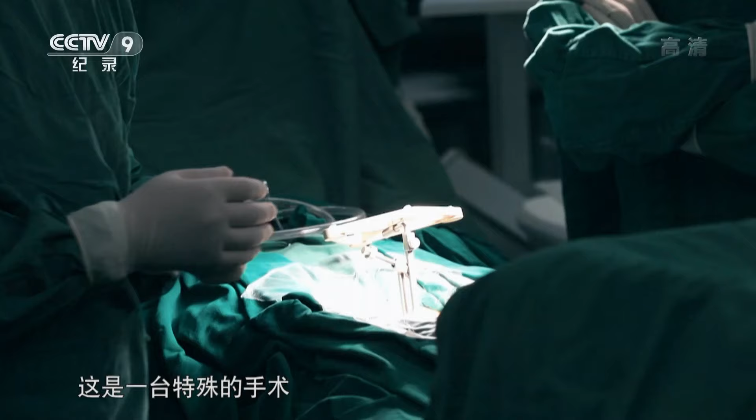Liu Huashui is the director of the orthopedic department and lead surgeon for the coming operation. Lu Shidong, an experienced expert, will assist with and supervise the procedure. This is a special operation. There is a third, more unusual surgeon, an orthopedic surgery robot, to assist with the operation.

The robot is unique. It is the only robot in the world that can perform an orthopedic operation on the limbs, pelvis, and spinal column. It's the 3rd generation medical assistance robot, a leading machine in its field globally.

Some 1,000 kilometers west of Jinan, in the ancient city of Xi'an, another important surgical procedure is in progress. This is an operation to repair a damaged chest wall. Huang Lijun, thoracic surgery department director, will perform it. He would implant a piece of artificial bone.

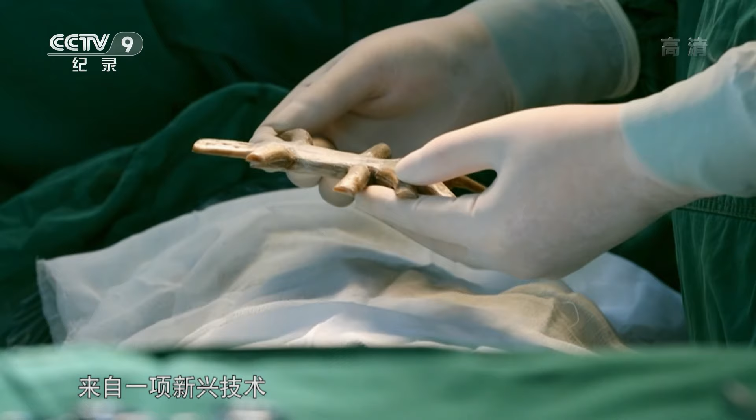The artificial bone is made with remarkable new technology. The patient's chest was seriously injured in a car accident. Researchers have fabricated an artificial breastbone and rib section from polymer materials molded by a high-energy laser beam. The artificial bone was printed layer by layer, enabling it to be as complex and intricate as its natural equivalent.

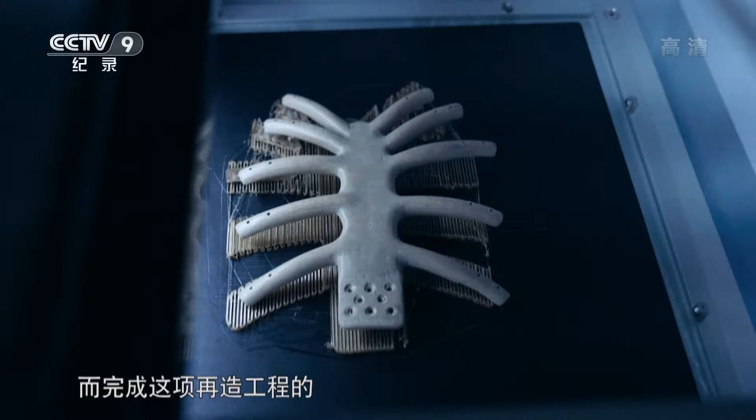The artificial bone owes its existence to 3D printing technology that is now revolutionizing manufacturing.

Meanwhile, in Xinxian County of the inland northern province of Shaanxi, Zhang Jie leaves his home for work. He works in a coal mine. He is the 3rd generation of coal workers, with his father and grandfather also coal workers. At 7:30 a.m., with his work clothes on, he rides an underground shuttle bus. It takes him half an hour to reach the coalface 100 meters underground.

Were this an ordinary mine, he would soon be as black as coal. This is no ordinary mine, however. Zhang Jie steps into a control room and turns on the machine he will operate. A few dozen meters away, it comes to life with a roaring like thunder. The earth shakes, and soon it is plowing into the coal seam.

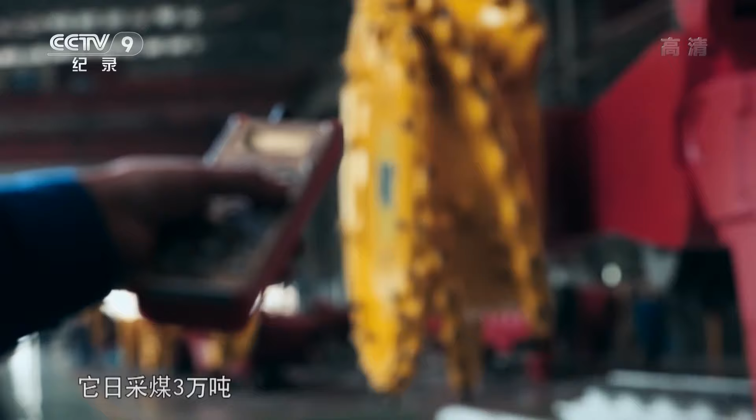The machine can mine 30,000 tons of coal a day, equal to the output of 1,000 traditionally equipped coal miners in a month. It can work non-stop in dark, humid, and dangerous underground tunnels. It is China's largest automated miner, the MG2662 intelligent coal mining machine.

China, with a population of nearly 1.4 billion people, overtook the United States in car sales in 2009. It has since been the global industry's biggest market. China's car demand is expected to reach 30 million by 2020. Doing so didn't just require a giant industrial capacity, special equipment was needed too.

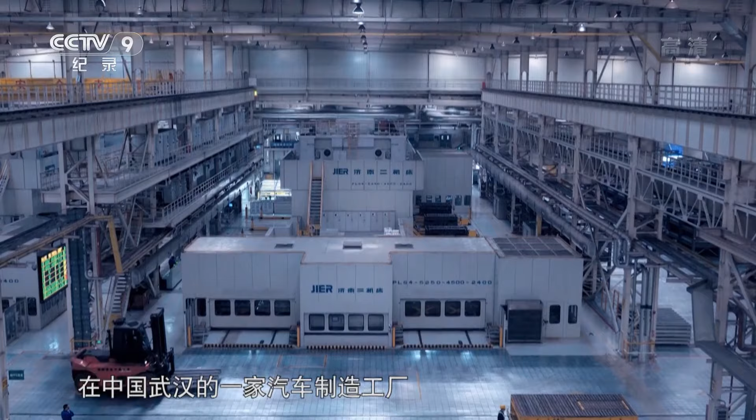At an automobile factory in the central city of Wuhan, a high-speed intelligent stamping system is operating day and night. Component inspector Yue Xuan is checking on the quality of its output. The intelligent stamping line can stamp 15 pieces of vehicle paneling per minute, making it possible for China to continue as the world's largest automobile producer. It is the world's leading high-speed intelligent stamping equipment.

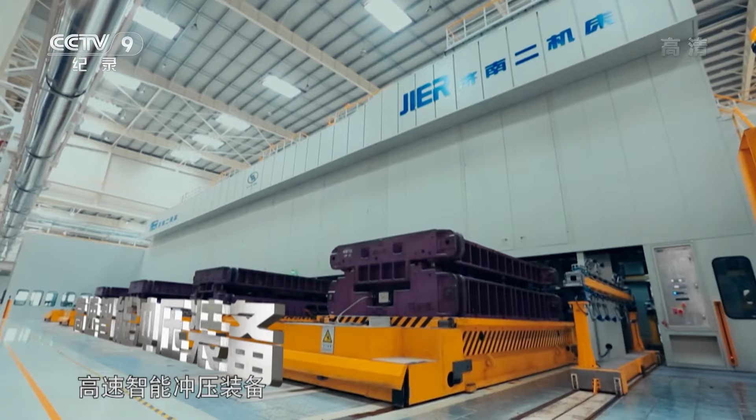The world's leading orthopedic surgery robot. Cutting-edge 3D printing. Automated comprehensive coal mining machinery, and the world's most advanced intelligent stamping equipment. Intelligent manufacturing is creating infinite possibilities for China's future.

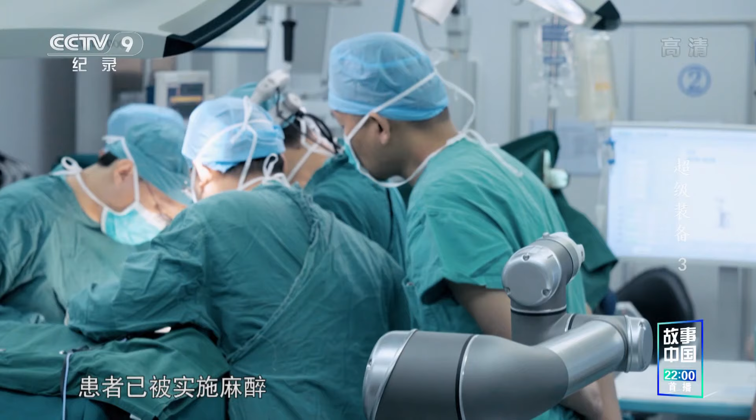In the orthopedic operating room in Jinan, the patient has been anesthetized. Lin Huashui is checking a 3D X-ray scan to finalize the procedure's plan. Next to him, the surgery robot has been wrapped with sterilized film, ready to fulfill its mission.

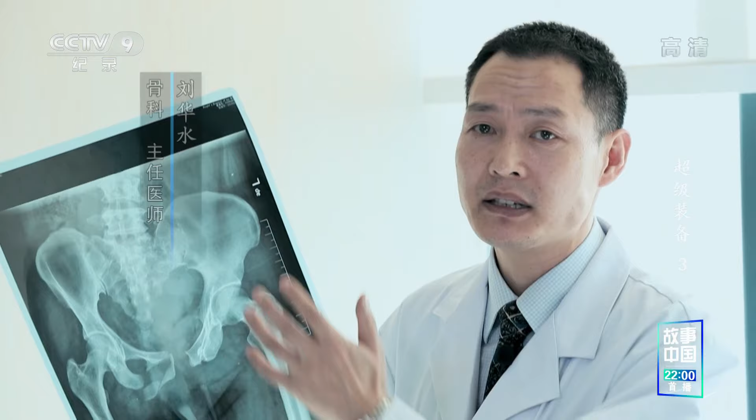The patient was injured in a car accident. Her whole pelvis was broken. A bone fragment is stuck in here, and if we don't deal with it properly, she'll become a cripple. After some discussion, we concluded that in this operation, the surgery robot can help to insert a screw.

In fact, 400 kilometers to the northwest in Beijing, similar operations have been performed countless times. Xu Jin, the research and development director of the orthopedic surgery robot, knows its every function.

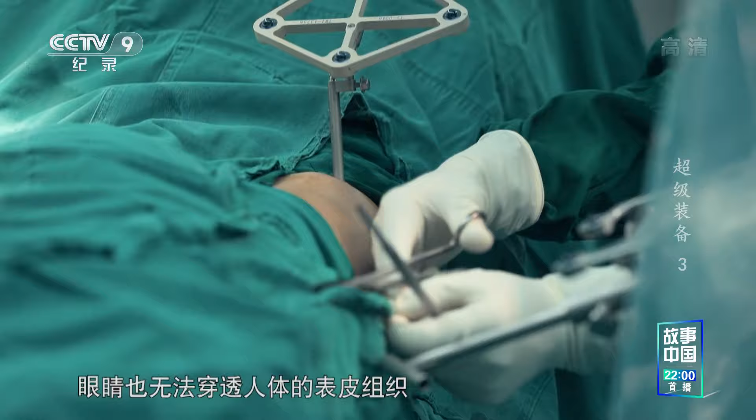The biggest challenges for doctors in minimally invasive operations are the limits of eyesight and the instability of hands. No matter how skilled an orthopedic surgeon is, his vision can't penetrate human skin to see the internal structure of bones, and his hand movements can't be accurate to a level of microns. In orthopedic operations, if a screw isn't accurately inserted and touches nerves or blood vessels, the patient may be paralyzed or even die. This kind of risk in operations has been unavoidable.

The orthopedic surgery robot, however, is not subject to human limitations. Its optical tracking cameras can see the bones under human skin and tissue.

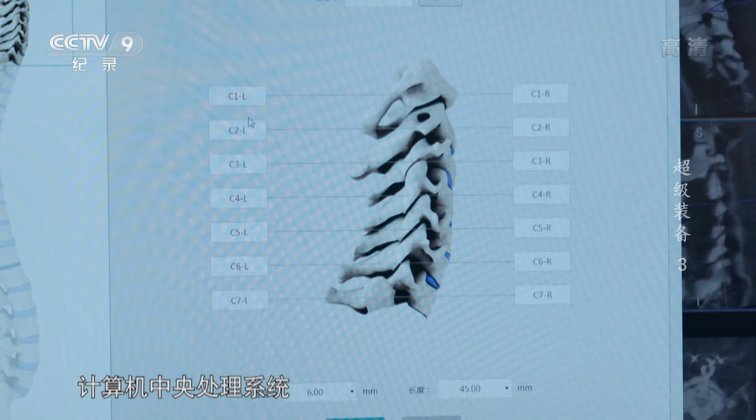Its mechanical arm can perform surgery to a precision of 0.8 millimeters. The central processing system is like the brain that processes the information fed into it by the tracking cameras before directing its arm to perform surgery to a degree of accuracy that is beyond any human.

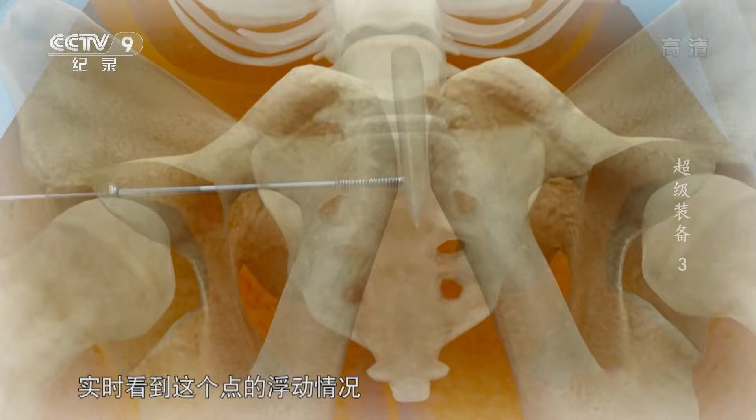Imagine a black box with a pearl at the bottom. We need to send tweezers in through a hole in the top of the box to fetch the pearl. The robot is designed to assist the operator to see the scene inside the black box, to fix the position in real time, and to complete the task with a very steady arm. Only with these requirements can the task be carried out.

The surgery begins. Liu Huashui makes a small incision. After carefully consulting the scan, he sends the operation command. Will the orthopedic surgery robot conduct the operation accurately and successfully as expected?

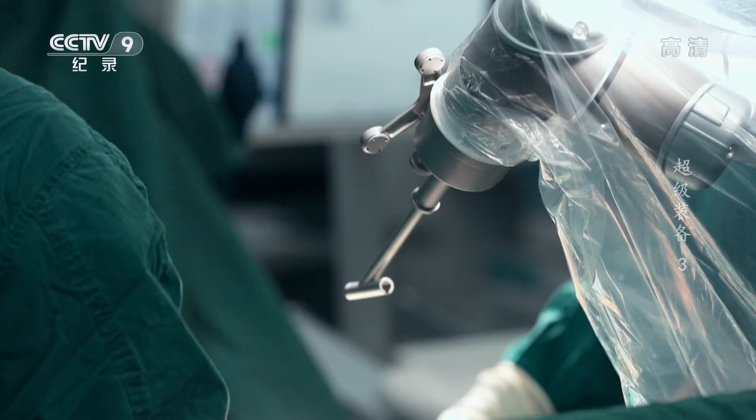Xi'an's famous giant wild goose pagoda lies about 4 kilometers south of the old city walls. It was built over 1,300 years ago to house sacred scriptures. Its brick square pavilion structure makes it typical of the Tang dynasty. Today, with 3D printing technology, it's possible to replicate it in perfect miniature without picking up any bricks or tiles.

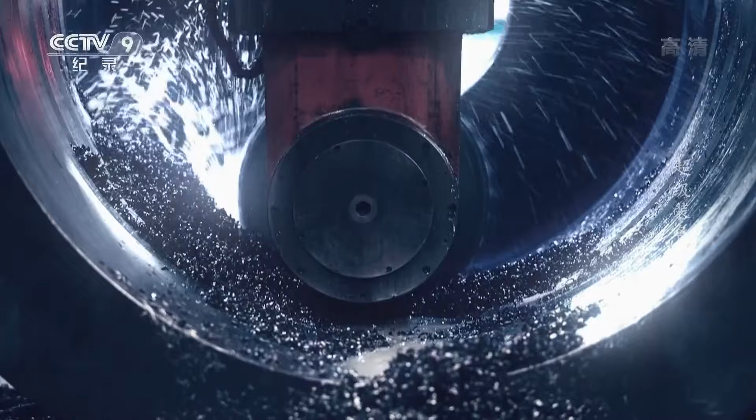3D printing is also known as additive manufacturing. The means of manufacturing mainly include subtractive manufacturing, equal manufacturing, and additive manufacturing. Subtractive manufacturing means to bore, mill, and cut out parts so that original materials are reduced in size. Equal manufacturing means working on a piece of material over and over without subtracting or adding anything to it.

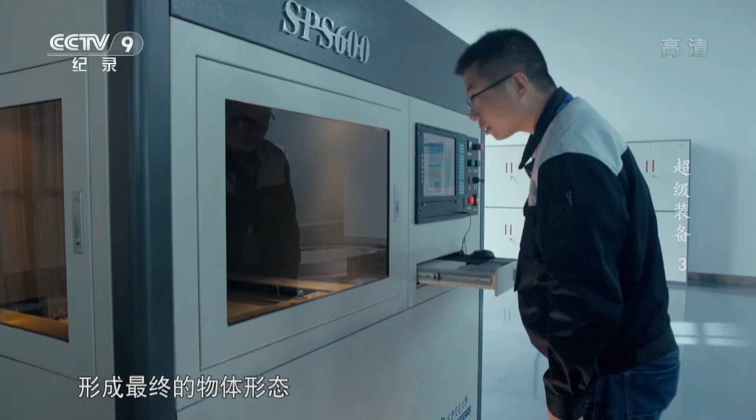Additive manufacturing, or 3D printing, works by irradiating a powdery metal or polymer material with laser beams to form molten pools of the material. These pools then solidify, and with the movement of the laser beam, they are added, quickly accumulating to fabricate the final object. It's called additive manufacturing because it creates objects by depositing a material, one layer on top of another.

Just like a bird builds its nest. If a bird is like a craftsman, the process of building a nest is a process of getting additional materials. Its beak is like the 3D printing machine, and its nest is the final product. But we manufacture more complicated models than nests, and with better quality.

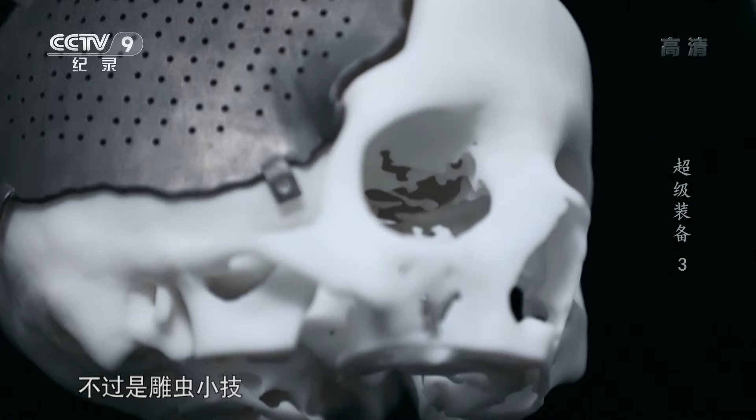Li Bingheng, a leading figure in the National Innovation Institute of Additive Manufacturing, has over 20 years' experience in 3D printing. For his team, printing a miniature of the giant wild goose pagoda is nothing more than a small trick. Now, with the help of biological 3D printing, their aim is to rebuild damaged bone in the human body.

Every person is a unique individual who can't be replicated. But the human body is symmetrical. If we lose part of our bones in a car accident or because of disease, can we replicate the missing portion from its mirror equivalent and implant it?

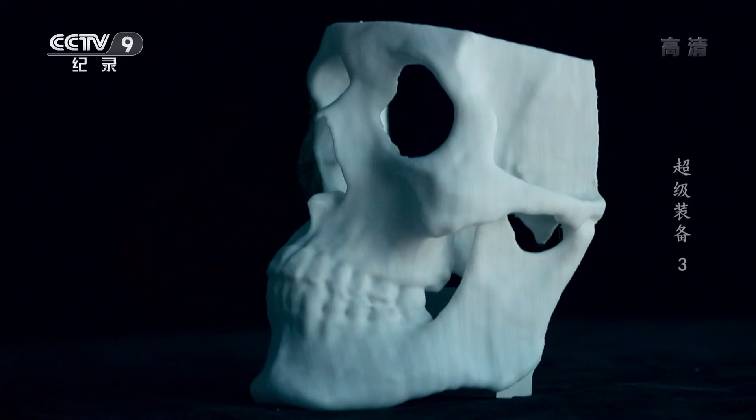We can make an operation plan beforehand. We can restore the defective right side by copying the intact left side. With a 3D printing machine, we can print out an implant. The application of 3D printing to medicine will outmode traditional ways of treating patients and performing surgery.

The thoracic surgery proceeds well under the direction of Huang Lijun. Before the operation, based on the CT image of the intact part of the patient's breastbone area, Li Bingheng's team and Huang designed a 3D digital model for his artificial breastbone and rib section.

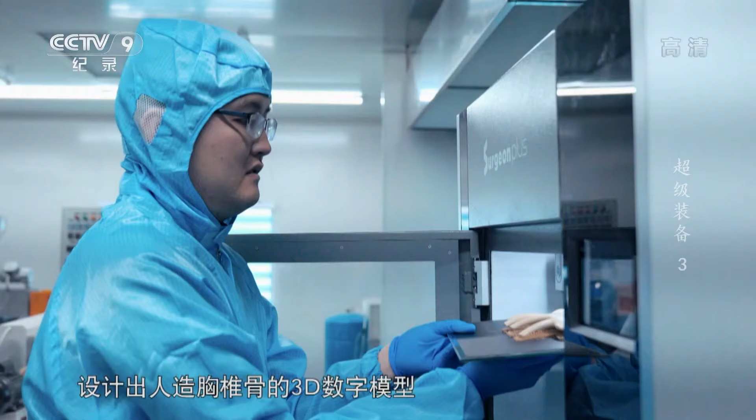When an artificial implant is made, a series of complex issues, such as materials to be used, toxicity, and rejection must be taken into account. For material, the surgeons in this case needed to research thoroughly to decide whether to use titanium alloy or a new polymer material.

Titanium alloy has better biocompatibility and fewer side effects, but in some cases there can be problems. For example, if the skull is injured and we use titanium alloy to mend it, metal has high heat conductivity, and since it's close to the scalp, it's influenced greatly by outer temperature. In this case, the patient may feel his or her head is cold. That's not good. PEEK material, by contrast, is more like human bone. In terms of strength, it's even better than bone.

PEEK, short for polyether ether ketone, is an organic thermoplastic polymer with a similar hardness to human bone and good biocompatibility. Huang Lijun has performed operations successfully with this material. Artificial bones made of PEEK material were printed out precisely and implanted into his patients' bodies.

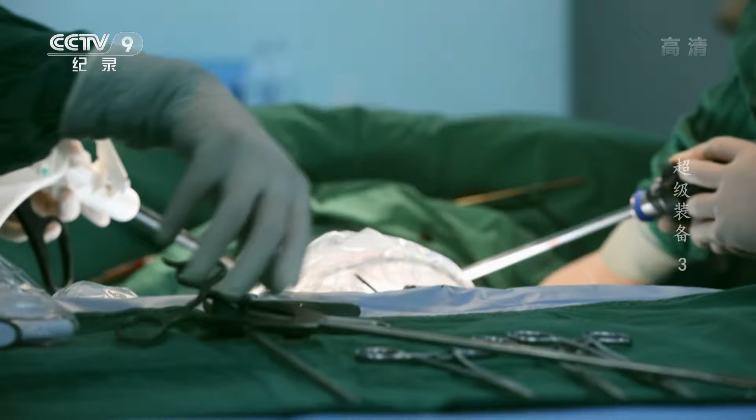In the past, it was very difficult to repair large chest wall defects. But in recent years, with the development of technology, especially 3D printing technology, we've seen its merits and applied it to the rebuilding of chest walls. With this powerful modern technology, we can now save more lives.

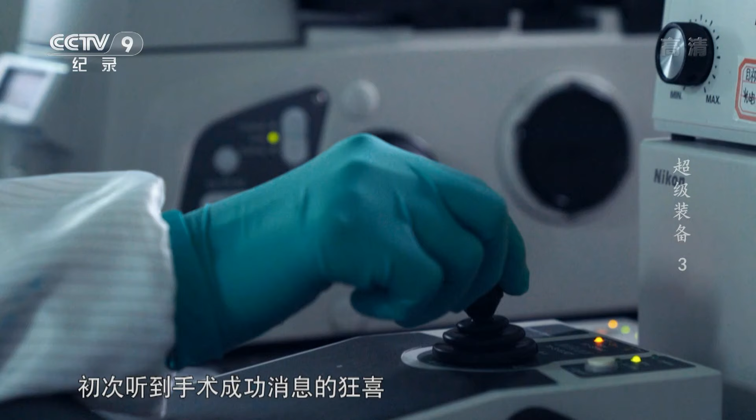For Li Bingheng's team, the joy felt on hearing the operation was a success has already given way to thoughts about their next step. In China, over 200 operations like this have been successfully performed. Their ambitions now lie in going further.

We will focus on biologically active tissue. The human body is one big piece of tissue with lots of holes. Liquids, like blood and bodily fluids, flow through it constantly. The next problem is to make sure 3D printed tissues can function normally in terms of bodily fluid flow and neuron growth. One hot area today is how to manufacture biologically active organs, including artificial skin, cornea, and cardiac valves. It's a promising area.

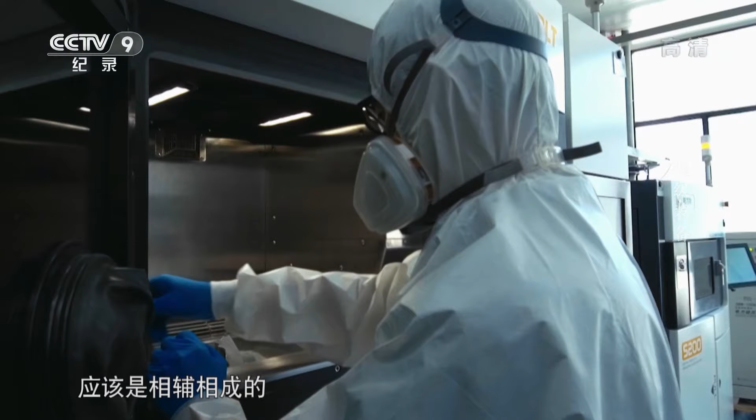Regenerative medicine has made impressive progress. With 3D printing, it's now possible to produce biologically active organs, to research into genetic science. As a result, lifespan should be increased, with organs staying healthier longer.

Back in Shanxi, Zhangzhai's intelligent mining machine is shearing off tons of coal underground. The provincial capital, Taiyuan, meanwhile, the factory that created it continues with development.

The MG2660 intelligent coal mining machine is 16.9 meters long, 6.4 meters high, and it weighs 166 tons. 4 slipper legs rest on rails to move it back and forth. Each of 2 rocker arms raises and lowers a shearing roller, spinning at high speed to cut through the coal seam.

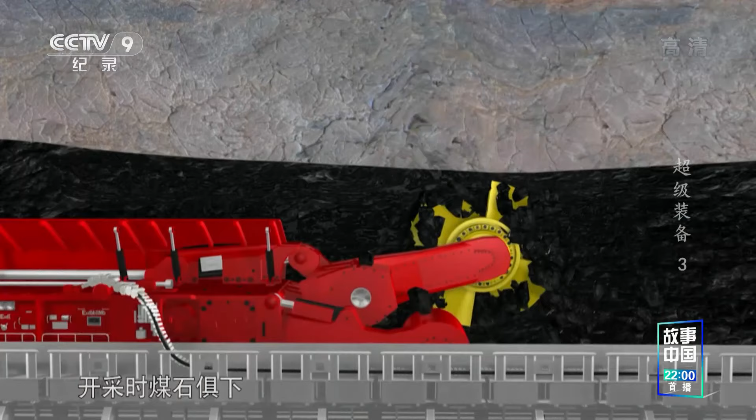To work intelligently, the first thing the machine must do is recognize a coal seam. Otherwise, rock will be sheared along with coal, reducing its quality, damaging the equipment, and even hindering the normal operations of the mine. Recognizing a target object or material and telling it apart from what is unwanted is a basic problem in artificial intelligence. In this case, how is it achieved? How to make the machine only dig coal and avoid rocks?

Hao Shangqing is a senior engineer with over 30 years of experience. To tackle the problem, he has done research all around China and consulted many geologists and industry experts. In the end, he worked with China University of Mining and Technology to arrive at a solution: use other methods to solve the coal mining problems. That is his plan.

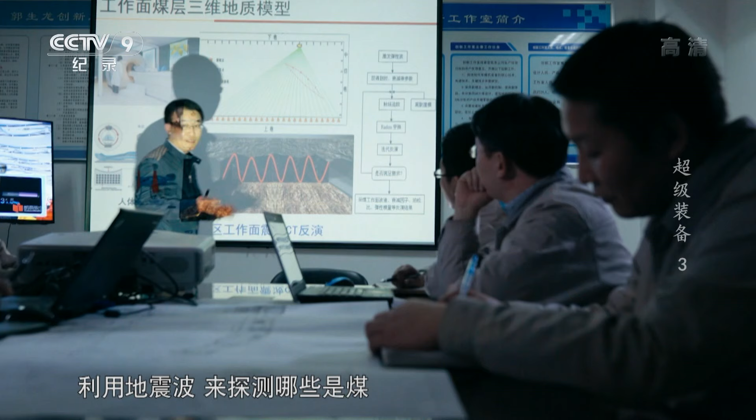Seismic wave receivers are arranged in the tunnel, and seismic waves are used to detect where coal is located. Sensors attached to the machine's rocker arms recognize the different vibration frequencies of rock and coal. Then, with the help of an inertial navigation system, the machine can alter its positioning of the shearing rollers to avoid rock. Detection with seismic waves is like a CT scanning of the coal seam. The sensors are like the human nervous system, and the inertial navigation system is the human visual system. When the intelligent mining machine works underground, it'll cut and collect coal and avoid rocks.

Spinning at high speed, the mining machine's rollers feature hardened metal claws weighing 12 tons each. The rocker arms must support this weight, so stability is a challenge. When the machine was first designed, the weight of each rocker arm was 24 tons, which rose to 37 tons with the addition of a 13-ton shearing roller, since the 2 rollers move towards the same side. When the machine is working, it might lose balance and even overturn.

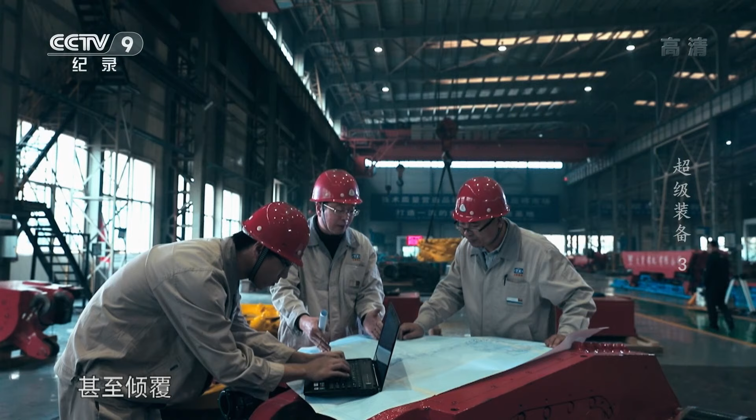Engineer Zhang Mingli redesigned both the rocker arm and roller to reduce their weight. His calculations took into account the geological environment of the mine and the force-bearing conditions of the machine. Through data analysis, the combined weight was reduced to 35 tons. Finally, the structure was improved. The hardness of the metal increased, and the weight of the machine is now at a perfect standard. Stability has been achieved.

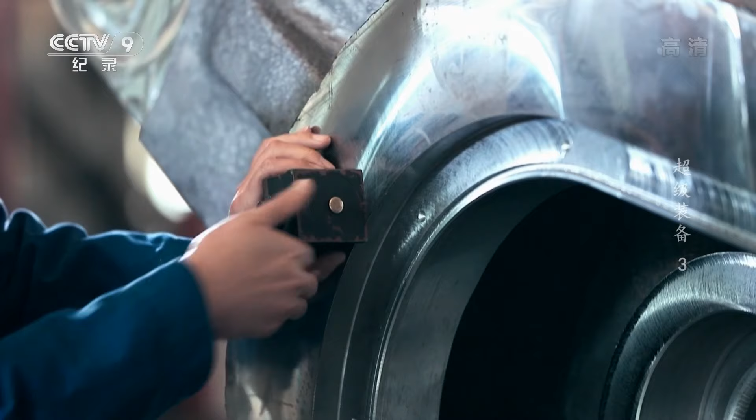Chang Zhenji, a technician in a machining workshop, is doing a tolerance test on the rocker arm frame. This is a precision test that must be performed after the rocker arm frame is finished. Through an accurate testing of points, lines, and planes, errors arising in the machining process are revealed. As he makes small adjustments, data on the smoothness and surface finish of the frame are being displayed on his computer to a level of microns.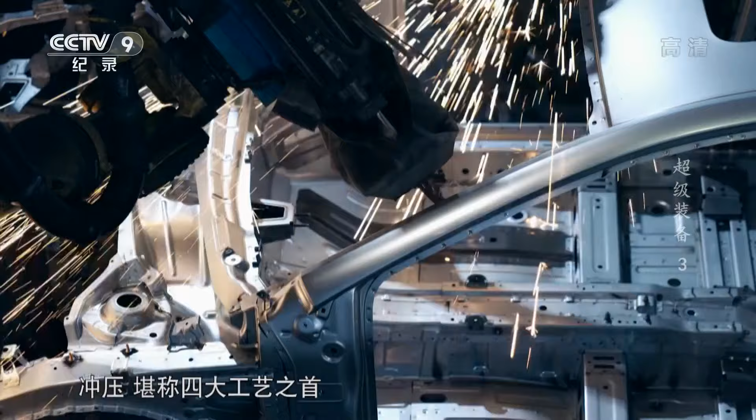In a car-making factory in the central Chinese city of Wuhan, a high-speed intelligent stamping system is working around the clock. Automobile manufacturing is normally made up of stamping, welding, painting, and assembling processes. The technology of stamping is considered the most important because over 70% of components are produced that way. A stamping line includes 4 multi-connecting rod press machines, a 2-armed feeding system, and an unstacker. To build it, essential technologies applied include a hydraulic die cushion, a simultaneous control system, an automatic mold changing system, and a whole line protection system. It represents the world's most advanced stamping technology.

The stamping system itself is produced in Jinan. The factory that made it has a history of over 8 decades, meaning it has witnessed great changes in Chinese industry.

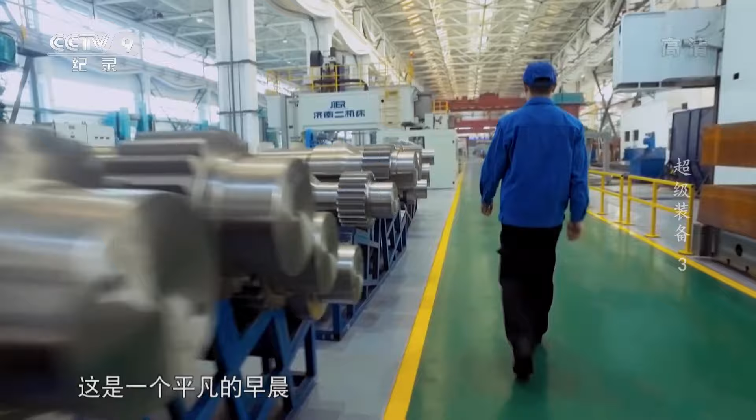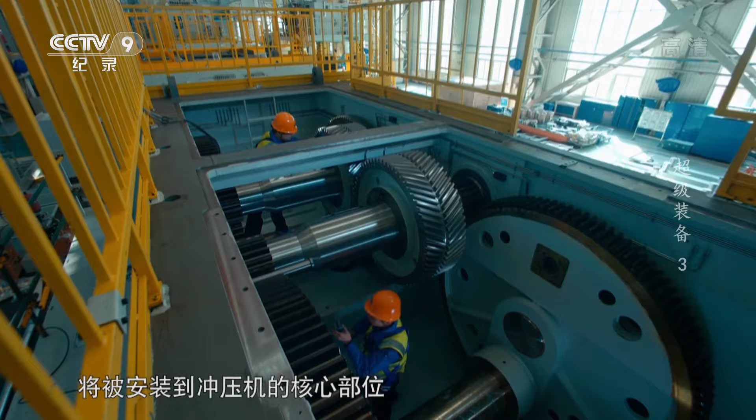Today, the factory is running smoothly, and Xing Yuji is spending the morning in the gear workshop. A graduate of the Shandong University of Technology, he started work in the factory 6 years ago. He operates 3 machine tools by himself. The large gears produced by these machine tools will be installed as core components of the stamping system at the heart of its work, turning out 15 automobile panels per minute.

As usual, Xing logs into his computer with his personal data card. Technical drawings of gears and process are stored in the computer, and only he has the authority to see them. After retrieving the drawings, he sets the machine to operate.

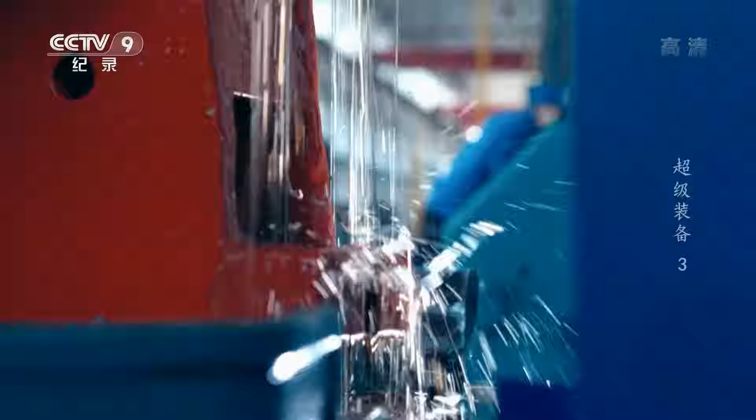6 years ago, when he started working at the factory, the setup was completely different. In those days, the first thing he did after arriving at work was to borrow the drawings from the design room. But very often when he arrived there, he would find other workers had already taken them. So he would have to go and look for them.

Now, we store drawings in the computer. With this information card, I can find the ones I want. In this way, the drawings will not be lost, leaked, or tampered with. Now, all he needs to do is input a command, and the 3 machine tools will start to operate automatically. Paper drawings are a distant memory for him.

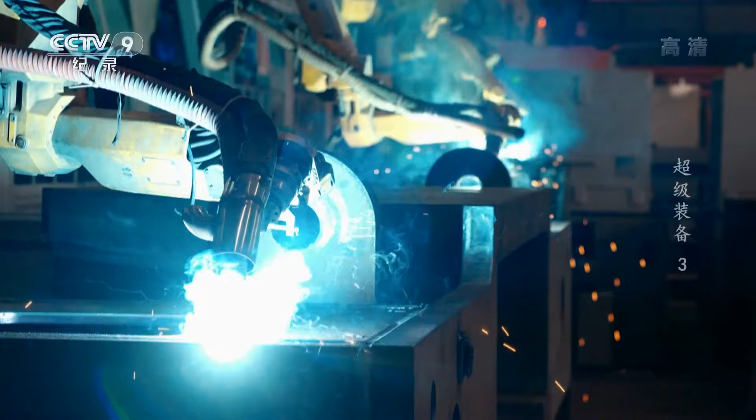At 10:30 a.m., 4 hulking metal shells are lined up in the welding workshop. They will be welded into the main beam of the stamping machine. 4 welding robots will complete the task. Each piece of precisely cut thick steel plate is tightly welded. Each welding joint is even and neat.

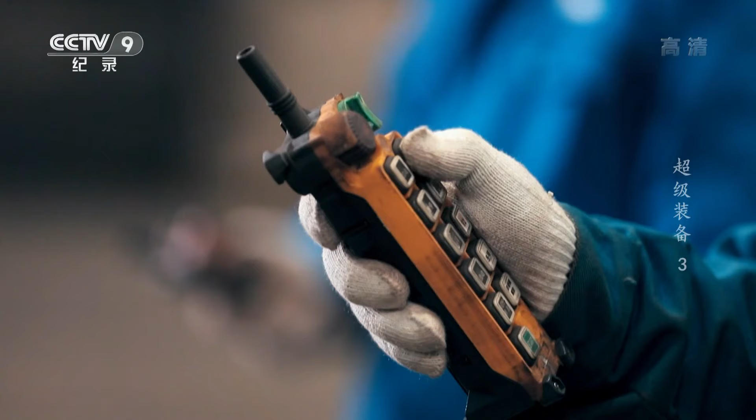Wang Yong is a senior technician. He has been welding for 30 years. Today, he doesn't need to wield a hot torch and sweat behind a heavy protective mask. Instead, no matter how delicate the task is, all he needs to do is to input a command, press on a remote control, and welding robots will do the rest.

In the past, we did the welding work manually. It was normal to burn our feet or hands, but now that rarely happens because robots replace us to complete the work. They are highly efficient. The work is finished with a better quality and nicer appearance.

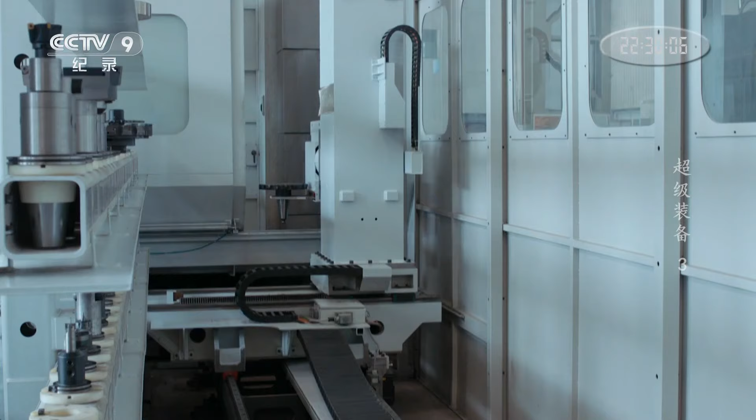In the afternoon, in a heavy processing workshop, a CNC planer type milling machine is about to change tasks. An intelligent automatic tool changer will change a tool bit. Its mechanical arm picks up the new tool bit, which is a circular cut head, and passes it to the milling machine, before removing the old tool bit to precisely install its replacement. Then it deposits the old tool bit safely in a rack.

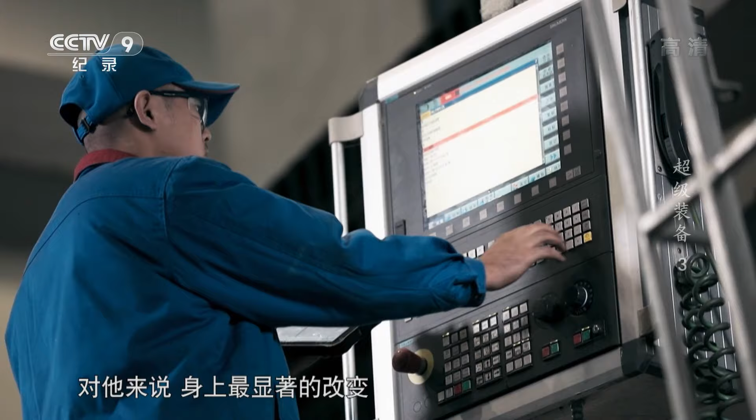Zhang Lei is an operating technician of the planer type milling machine with 13 years of experience. After the changing of the tool, he restarts the machine. For him, the biggest difference these days is that his uniform is always clean.

In the past, human workers changed the tools. The tools were too heavy for Zhang to lift with his hands only, so he had to use his chest and belly to assist. After completing the task, he was dirty all over.

But now the intelligent automatic tool change will complete the tough task. Zhang Lei doesn't even need to go down to the factory floor. He can remain up above with tablet in hand, input the required commands, and the tool changing machine will proceed by itself.

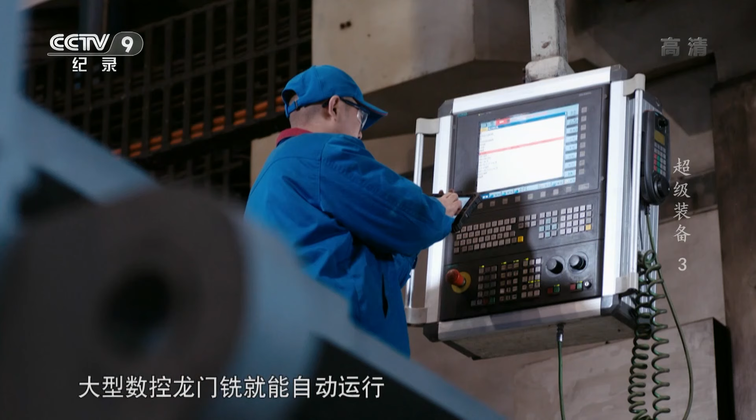Now all I need to do is press the button and the tools will be changed precisely. It's much safer. We are also equipped with the tablet to consult the drawings, so we don't need to climb ladders to fetch them.

Paperless gear workshops, intelligent automatic tool changes, and welding robots are all upgrading manufacturing. Manufacturing is becoming safer, more intelligent, and more efficient.

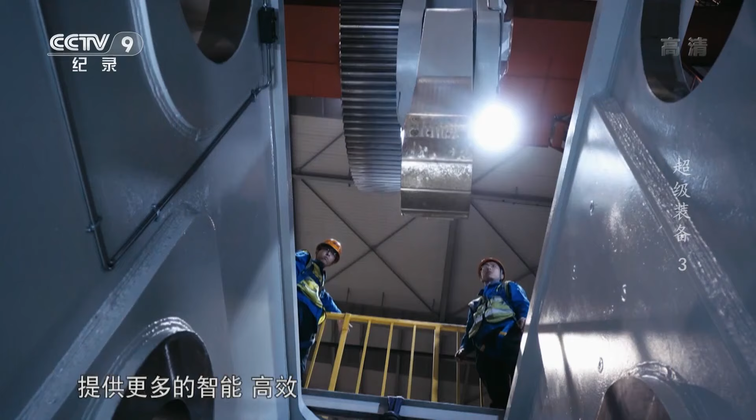We don't just produce an intelligent stamping system and an automatic feeding system. The whole manufacturing process is paperless, intelligent, and automatic. It's in line with the call for smart technology in our country.

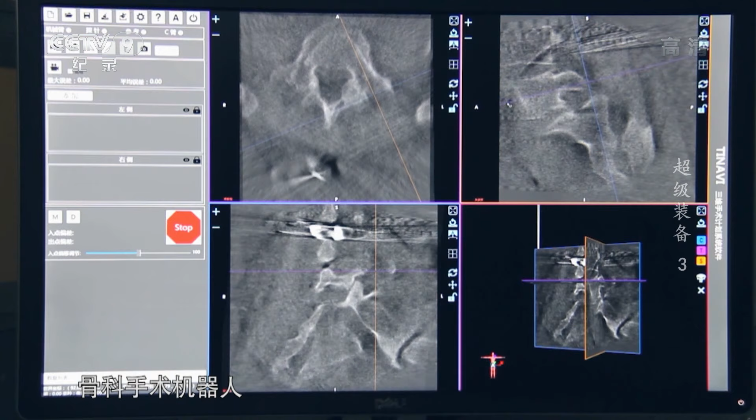Elsewhere in Jinan, the pelvic fixation operation performed by Liu Huashui is underway. 3D scanning data of the area to be operated on is being fed in real time into a central processing system. The orthopedic surgery robot will carry out the operation following Liu's plan.

Before the operation, the robot's mechanical arm tracker must be accurately calibrated. This is a positioning test. A 3-coordinate measuring instrument is used to test its positioning accuracy.

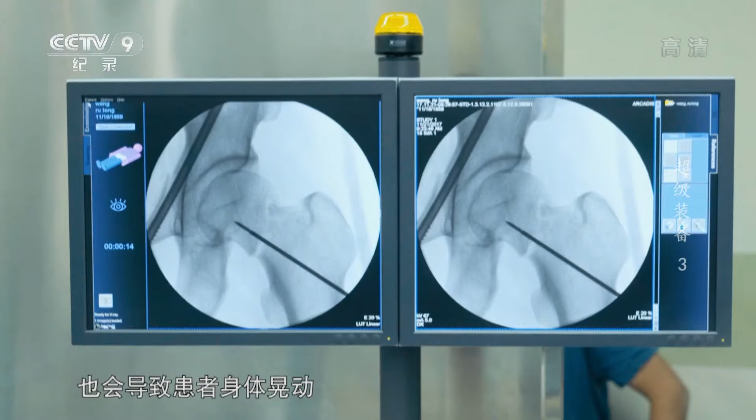Even in a state of deep anesthesia, a patient's breathing and heartbeat, as well as the doctor's operation, will cause their body to sway. Swaying, no matter how slight, makes accuracy harder. The swaying, therefore, has to be factored in as the target site of the operation is tracked in real time.

The central processing system uses the real-time data to control the robot's operating arm for subtle adjustments, to compensate for the patient's body sway, improving the accuracy of the surgery.

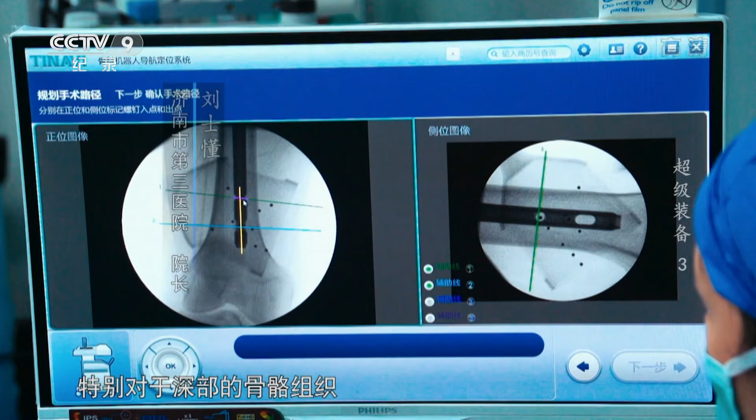As a doctor, I know the limits of our hands and eyes, especially for bones and tissues in the deep area. The orthopedic robot helps us complete complex operations in body areas where the human doctor can't see or touch.

The operation has reached a crucial moment. The robot directs its surgical tool to the required place and inserts a screw to a precisely predetermined depth from a precisely predetermined angle. Upon the lead surgeon's confirmation, the screw is fixed.

Finally, the operation site is X-rayed again. Liu Shidong and Liu Huashui confirm that the screw's position is exactly as planned. The operation is a perfect success.

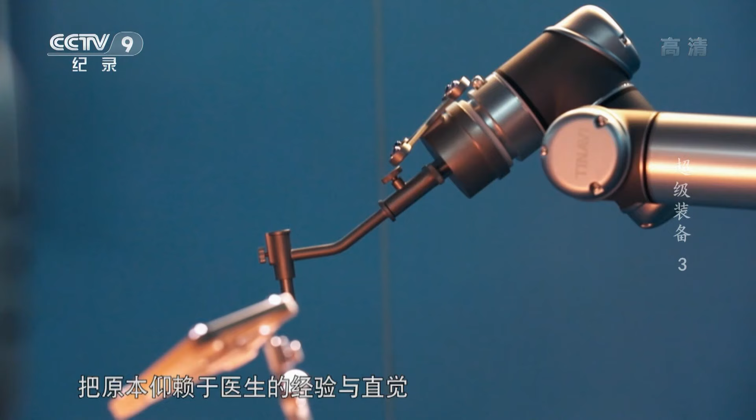The use of orthopedic surgery robots has turned orthopedic surgery, which was highly risky, into a scientific, quantitative, and controllable medical practice.

A 9-year-old child was brought to the hospital by his parents. They carried him in, holding him up by his collar. They said he had been to hospitals all around China, but none of them would treat him. Later, they found a hospital that could treat him.

We were very happy. Finally found a hospital that would treat him. But there was a huge risk of dying. While talking, they let go of his collar by accident, and the boy fell down to the floor, like mud.

We were scared, but the parents were quite calm, and they said he'd be all right. The whole family suffered a lot.

In this case, during the operation, the robot pushed the screw to the predetermined spot according to our plan, and it was a huge success. At that moment, I felt really excited. I think intelligent technology is a capable helper of doctors, and it drives medical work from its second stage to a higher third stage.

In the National Innovation Institute of Additive Manufacturing in Xi'an, Lu Bingheng's team are working for their dreams. Meanwhile, thousands of miles away in Beihang University in Beijing, a team led by academician Wang Huaming is also working on printing complex metal structures.

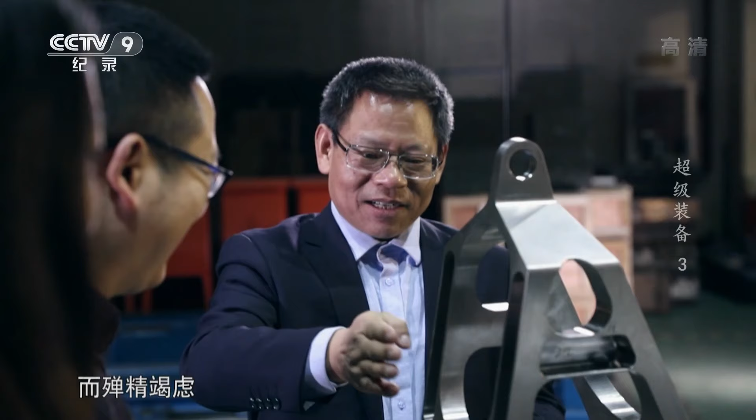Inside its protective case, the nozzle of a 3D printer sprays out a powder of micron-sized ultrafine metal granules continuously and uniformly. A high-energy laser beam irradiates the powder, melting it instantly to form a liquid molten pool. After the laser moves on, the molten liquid solidifies quickly and forms successive layers. The layers pile up to fabricate the final object.

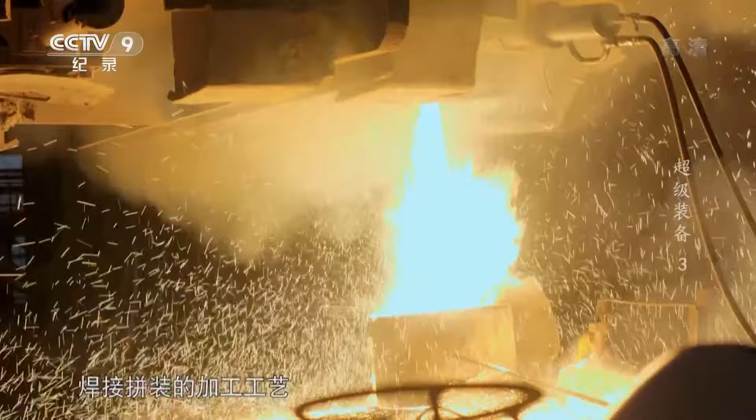Because of their large size and complex structure, some key parts of spacecraft can't be produced in the traditional way of welding separately made sections together. Doing so wastes a lot of materials and is time-consuming and very expensive. Moreover, each welding seam will be a weak point and a potential hazard for the spacecraft when subjected to high G forces.

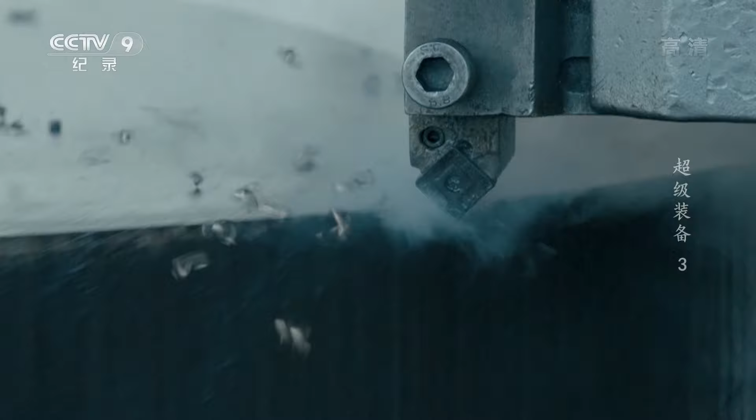It's very difficult to produce these large essential parts in a traditional way. Some technologies have almost reached their ceiling; any further advance will cost a great deal, and the loss outweighs the gains. So we need to change our approach, and things will become much easier.

An aircraft's landing gear is one of the most challenging pieces of equipment to make. When landing, the landing gear touches the ground first and has to bear an enormous impact. The performance of the gear is therefore critical to the safety of the entire aircraft.

Manufactured in the traditional way, landing gear will be composed of dozens of assembled components. With the method of Wang Huaming's team, however, a large and complex metal part can be 3D printed as a whole. It will not suffer from structural weaknesses hidden within its equivalent part made using the traditional method.

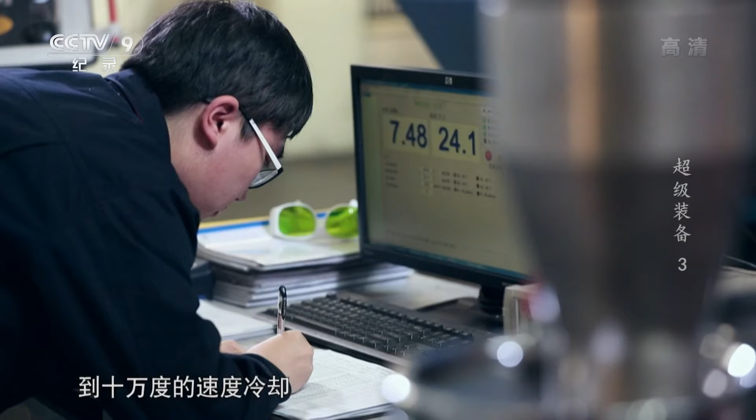During the 3D printing process, the metal powder melts instantly when irradiated with a high-energy laser. Just as important, when the laser moves on, the molten liquid solidifies at a speed of 10,000 to 100,000 degrees. Through quick melting and solidification, the crystalline interior structure of the finished part turns out to be even, with better performance by all measures than parts made in the traditional way.

The key to this problem is to make it cool down and solidify quickly. It is a frontier technology in areas of both metal material and condensed matter physics.

Today, 3D printing technology has been widely applied in aviation, spaceflight, and military fields. It is used to provide key components for satellites, spacecraft, Mars probes, space stations, and aircraft carriers.

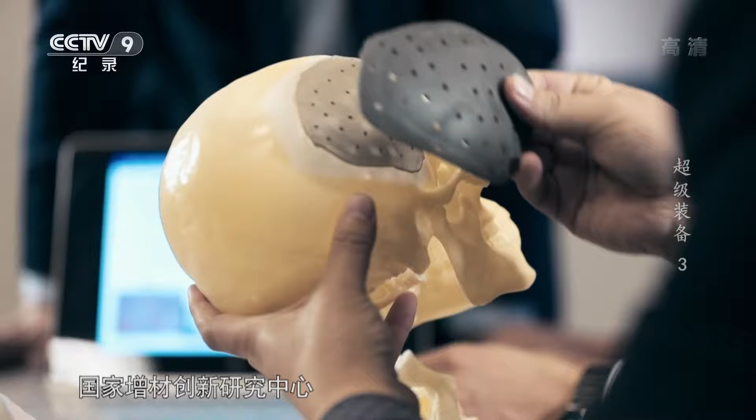At the National Innovation Institute of Additive Manufacturing, researchers continue to work on their terrestrial goals. Lu Bingheng, meanwhile, is thinking about how to get 3D printing technology to work beyond this, in outer space.

We can do some work in the space station, in outer space, or on other planets if equipment or parts are worn out or damaged. What can we do? One way is to print them out on Earth and send them to space, which is very costly. Why not take a 3D printer into space? If the space station needs something, the printer can print out a component, and the old one can be replaced. This way is more cost-effective.

What's more, we could print out a giant solar power station in space by 3D printing and get lots of energy. Then we can transfer some production into space, making full use of space and energy there.

All we need to do is send some powder materials into space, and we can print out high-speed trains and planes there and send them back to Earth. It'll save us lots of energy and land.

Night falls in Taiyuan, Shanxi Province. The assembly workshop for mining machinery is brightly lit.

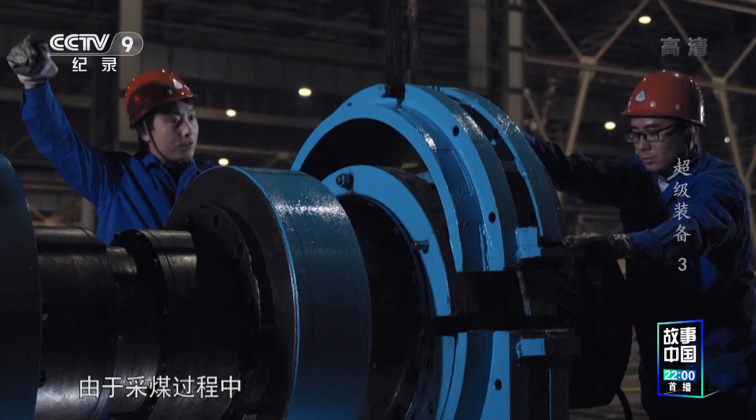Zhang Wenjun, a technician, is testing the rocker arm of the intelligent coal mining machine. During operation, the rocker arm provides support and power to the shearing roller and drives it to rotate at high speed. Its bearing capacity and precision of movement will therefore directly affect the whole machine's performance.

The 23-ton rocker arm is in place. Zhang Wenjun attaches sensors to its surface, then applies mechanical pressure to test its bearing capacity. All indicators show that its bearing capacity is extraordinary and up to international standards.

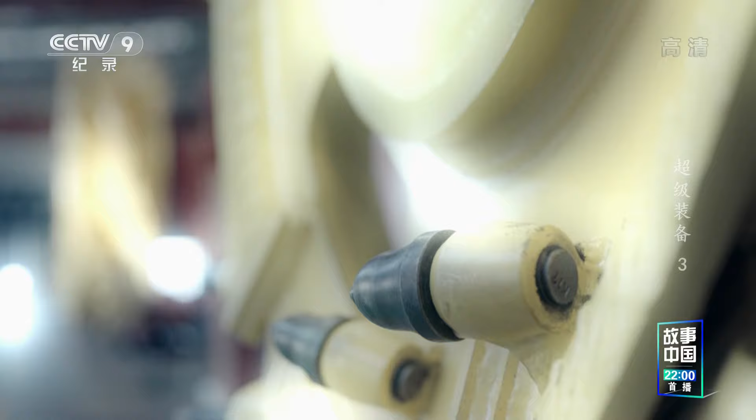Equipped with smart eyes to recognize coal automatically and its powerful coal-shearing roller, the mining machine is, in fact, one of a team of 3 equipment systems needed to achieve a daily output of 30,000 tons of coal.

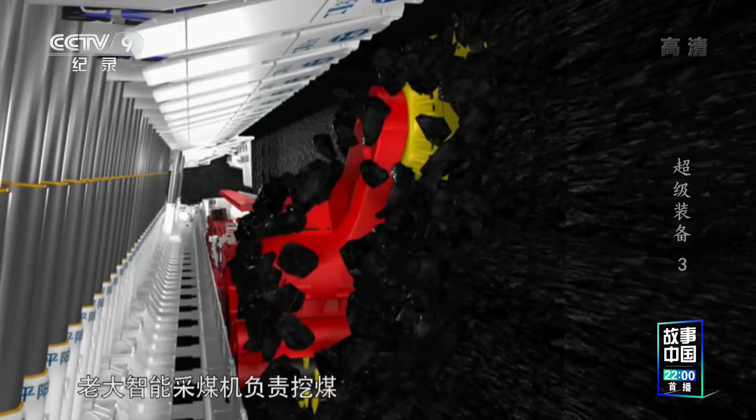The other 2 systems are a scraper conveyor and hydraulic support jacks. They are like 3 close brothers. While the intelligent miner digs coal, the scraper conveyor transports the coal, and the hydraulic support jacks set up its working space to ensure digging and transporting proceeds safely and smoothly.

The intelligent mining machine has usurped traditional methods of coal production. As a 3rd-generation mine worker, Zhou Kai no longer needs to physically handle coal like his father and grandfather did; he only needs to operate the machine. In a clean and safe environment, science and technology are indeed turning our dreams into reality.

At the stamping machine factory in Jinan, the beam installation work of an intelligent stamping machine is in progress. Afterwards, bearings and eccentric gear to power the machine will be installed in the beam cavity.

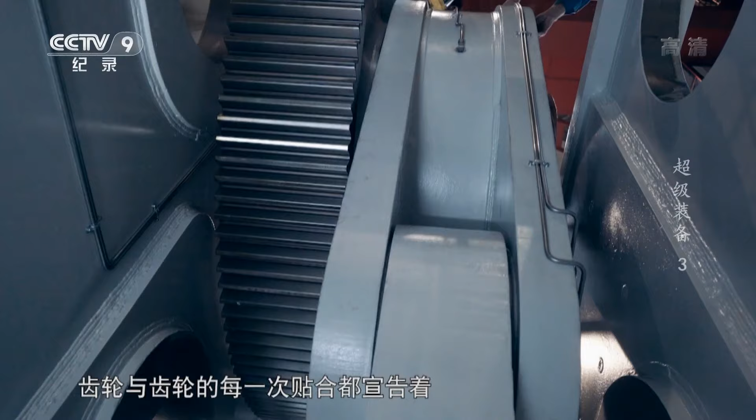Physical strength used to count in manufacturing. The power of modern machines comes instead from human ingenuity.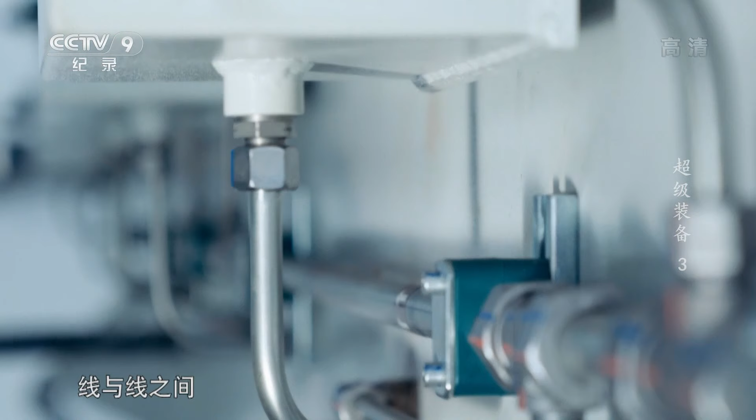Once the bearings and eccentric gear are securely in place, the installation of the machine's piping begins. The interval between the pipes, whether straight or curved, is constant, and each curve has the same radian. The piping indeed is like a stave on which music flows, a symphony to the dedication of its creator.

Xiao Tianfei, the piping installer, liked painting when he was a child. He entered competitions but failed to find success as an artist. Six years ago, he graduated from technical college and became a pipeline assembler.

I feel painting and assembling are equivalent. Pipes on equipment, I like the lines and sketches. They are artistic. For me, my job and my interests are combined. My dream has come true.

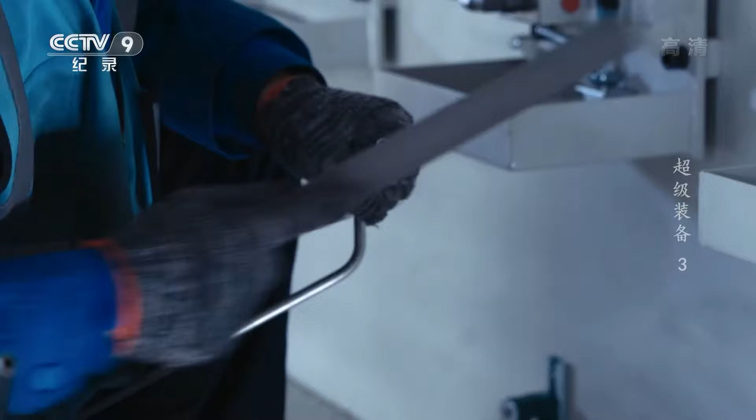It is not only the pipes installed by Xiao Tianfei that are perfect. All the fittings on the stamping machine are immaculate, as if the same master artisan installed them. Behind this industrial beauty are rigorous international assembly standards, and because it meets these standards, the intelligent stamping line has won orders from top international automakers.

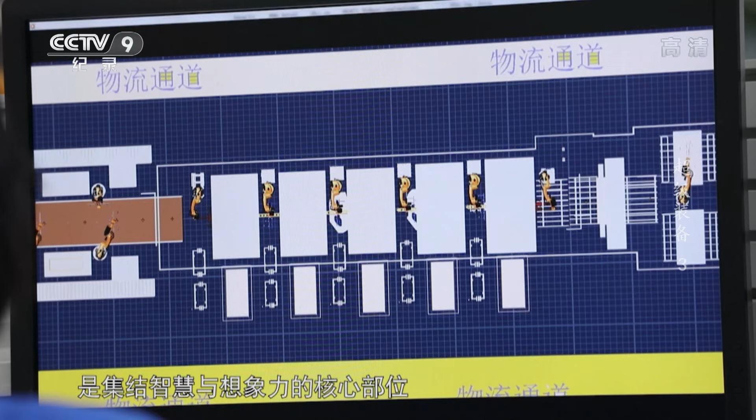This office is the design center of the factory, a concentration of its talent, wisdom, and imagination. Wu Yudong, a senior engineer who participated in the creation of 9 stamping lines for the Ford Motor Company, still remembers the 8-year battle his team fought for a breakthrough.

The first stamping line we built for Ford was examined by a large group sent by them. A dozen foreign experts came here and asked us to disassemble the line for testing. When the 8th and 9th lines were examined, they only sent 2 Chinese engineers from the Asia branch for testing.

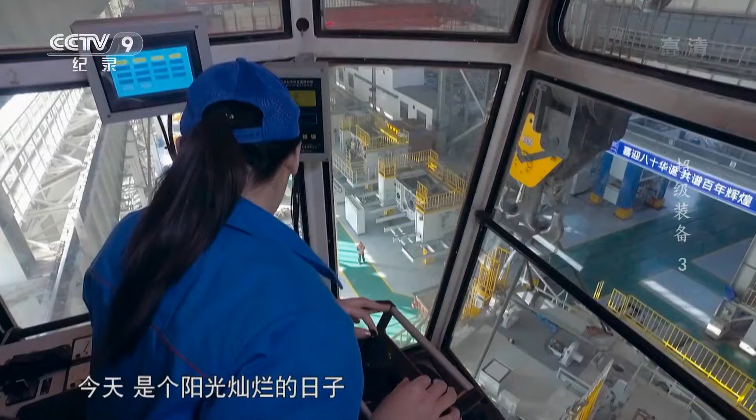Outside, it's a sunny day. Wang Xiaohan is sitting in a bridge crane control box, 20 meters above the factory floor. When she looks down, the giant machines and workers look like scale models in a toy land. It's very funny.

This is Wang's 4th year at the factory. Now 22 years old, she is training an apprentice. When operating the 300-ton bridge crane, she can lift equipment weighing hundreds of tons. Today, she is lifting the beam of a stamping machine. The beam has undergone all processing and installation procedures and will soon be shipped to a car factory to start its working life.

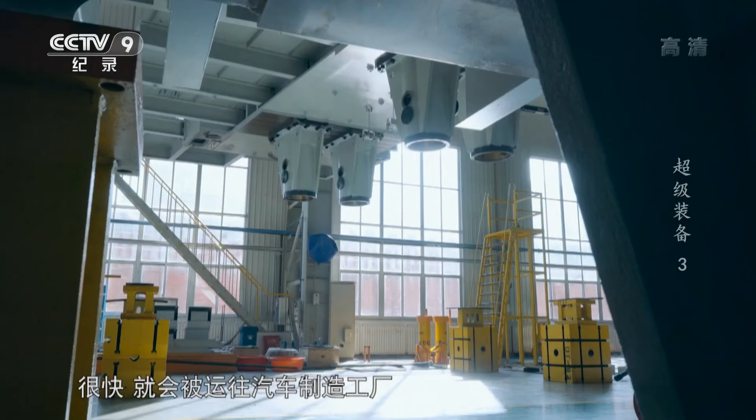In the car manufacturing plant in Wuhan, 5 large intelligent stamping lines are running at full speed. Ye Xuan's job as an inspector of parts will soon be taken over by a robot. His new role will be to be a good master.

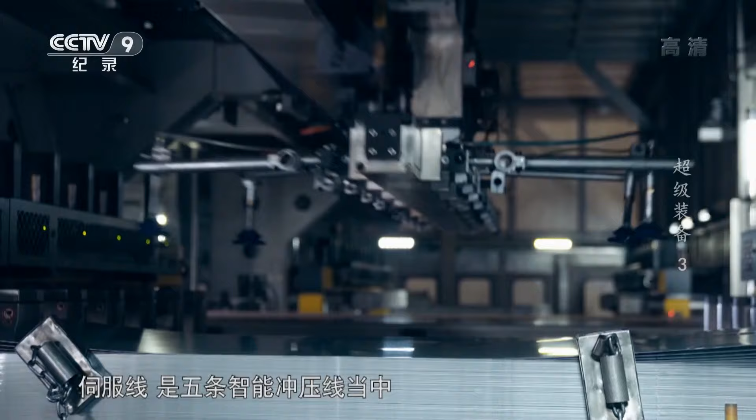The servo line is the most noticeable among the 5 stamping lines. The word servo comes from the Latin word servus, meaning slave. The line is not only intelligent and efficient, producing 18 auto parts every minute, but also safe, controllable, and stable. The word servo therefore expresses the wisdom of humans in balancing technological progress with mastery of the world.

You don't necessarily see your competitors as enemies. Although we compete with each other, we also cooperate. If there isn't a powerful competitor, our desire to compete and our motive for improvement won't be strong. The quality of our products has increased in the past few years. It is competition that has boosted the development of technologies and the level of management.

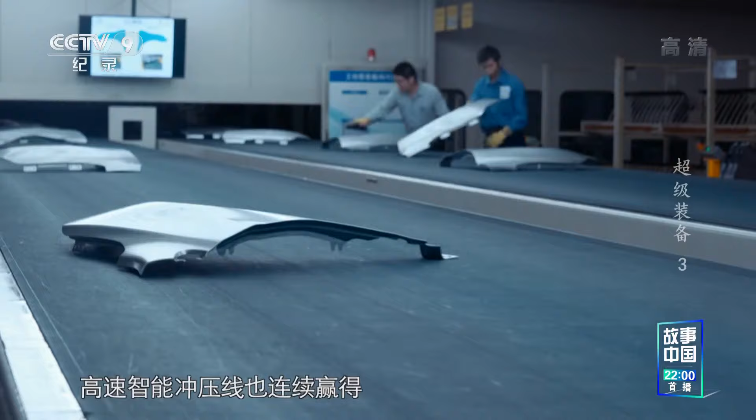Today, there are 9 intelligent stamping lines in total. The first 8 are operating at full capacity in 3 shifts. They make components for best-selling vehicles, including the Ford Raptor F-150, Transit, and Explorer. Other top international automakers ordering the system include Volkswagen, Nissan, and Volvo. This is truly win-win cooperation.

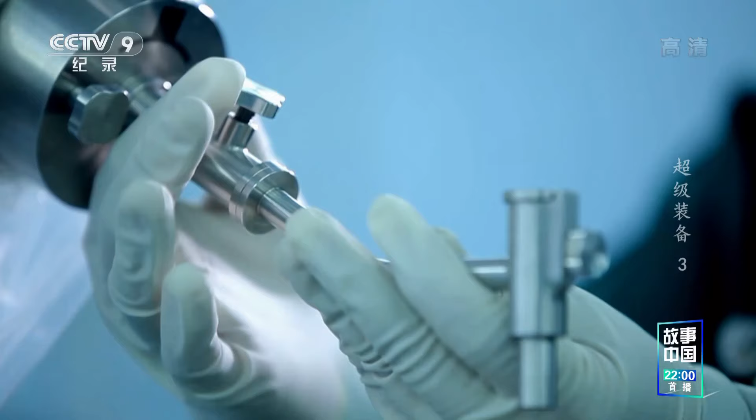From an orthopedic surgery robot that has revolutionized medicine in China, to 3D printing that has broken through the ceilings of traditional manufacturing. From an intelligent mining machine that has outmoded old methods of digging for coal, to a high-speed intelligent stamping line that has upgraded what it means to be made in China. All these marvelous achievements have their basis in ingenuity and innovation.

In manufacturing, more and more intelligent production systems are becoming a reality. In factories, a new round of innovative research and development is underway. And on the streets, cars developed with 3D printing and manufactured by intelligent machines are improving both performance benchmarks and living standards. In China, the story of intelligent manufacturing has just begun.